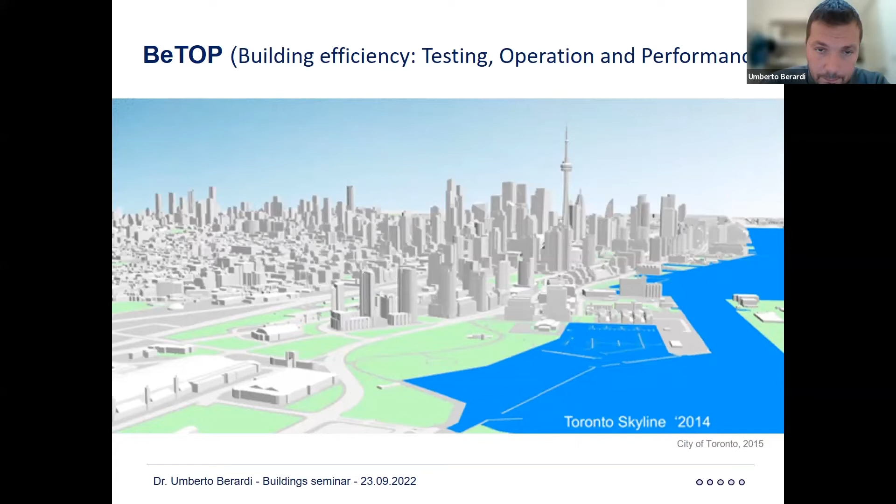So we have been doing new material development, but more importantly, we also have been doing testing in real field, a performance assessment of real buildings coming up and how those new technologies in example cases can really behave in real field.

So here is what I'm going to talk about today. As you see, there are 5 different points of my presentation that you can follow, 1, 2, 3, 4, 5, at the bottom right. And the reality is that I was asked to mainly focus on superinsulating materials, and in that field, my specialty is in aerogel enhanced systems.

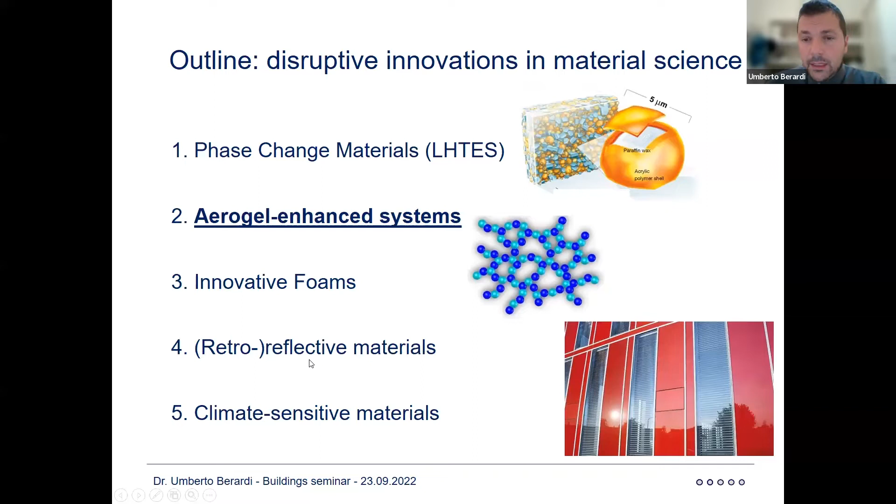But to give you a bit of an overview, I also have been taking the freedom to put a bit of slides on the possible values that phase change materials have in enhancing latent thermal energy storage in buildings, together with innovative foams. The point number 3, as another new category of environmentally friendly super insulating products. And then towards the end, very quickly and briefly, I'm going to speak about retroreflective materials and climate sensitive materials. So let's start together this journey.

Now, you all understand that at the end of the day, building is supposed to provide comfort for people. And in building codes, this is often pushing people to put more and more R-value. Our insulation thickness becomes thicker with a lot of troubles. Our layers are becoming multiple layers with a lot of extra troubles. But the reality is that R-value doesn't really always represent the solution to all the problems.

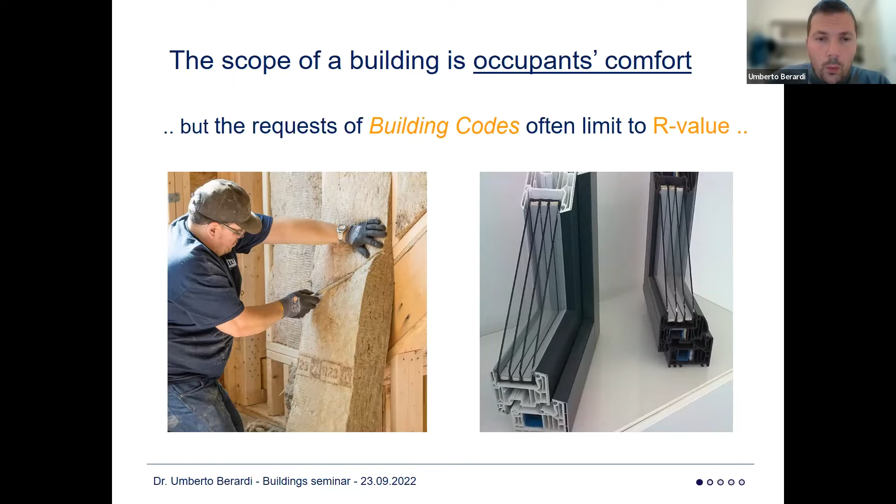And one of the problems that is becoming more and more important, especially in an era of climate change and heat waves and exceptionally higher temperatures than what we were used to have. Think about Toronto. We used to have no air conditioning system 50 years ago in the entire city of Toronto. Right now, in the city of Toronto, for many buildings, office buildings in particular, the cooling demand overcomes the heating demand.

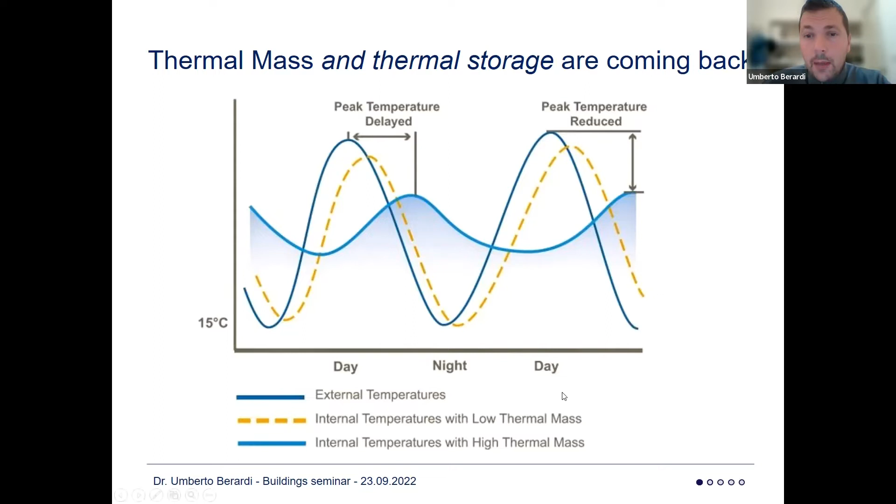So when these kinds of things are happening, thermal mass and thermal storage are coming back as an important factor to reduce the fluctuation of temperature and, more importantly, to slow down the request of cooling power, which is becoming dominant in most of the countries around the world.

Now, you can typically do thermal storage by using sensible storage. So you put massive buildings, massive construction, a castle, a church. You get there in the middle of the summer and it's extremely cold and nice and comfortable. But the reality, that's really not necessarily that sustainable.

It requires a lot of materials, a lot of mass movement that you need to do. And more importantly, it's hard to make skyscrapers with massive construction because you need to actually go up 200-300 meters from the ground with massive blocks. So the alternative way is by using latent energy storage.

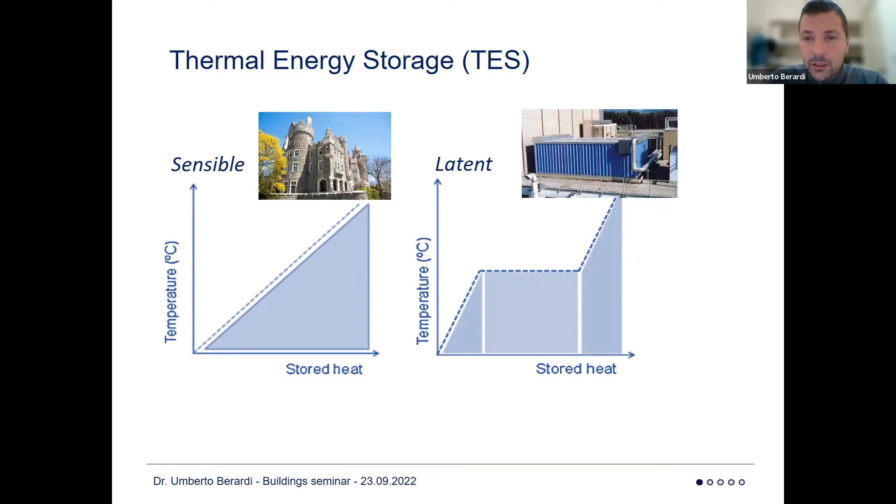So latent thermal energy storage is a new frontier in new materials that is basically applying to the building sector what we do typically when we put ice in a warm glass of water. So in principle, we are taking advantage of the fact that that mass of water, when it became ice, had a lot of energy subtracted.

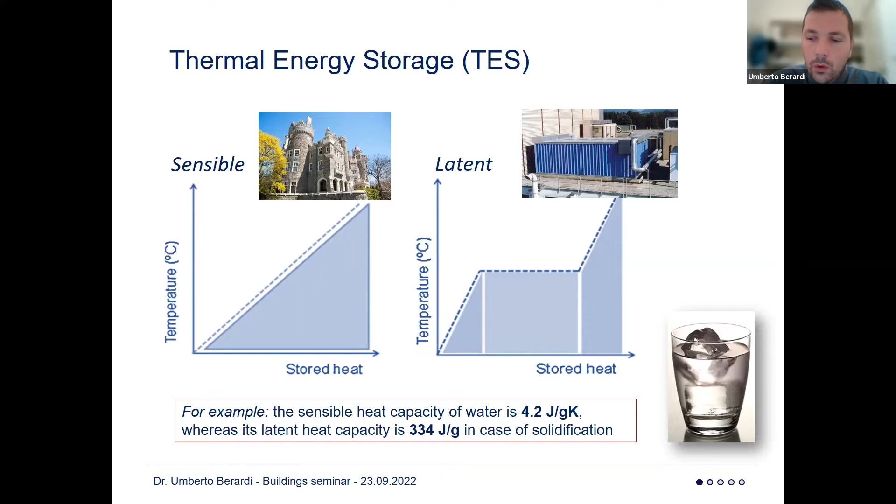And so when it gets into a warm water kind of mug, at the end of the day, it will grab a lot of that thermal energy back, it will melt, and then at the end of the day, you get a very cool glass of water. Now you can do these kinds of things also in buildings, making sure that you get materials that are melting and solidifying.

And because we don't actually like envelopes that are melting or are liquid, what we tend to do is encapsulation of a phase change material, so a material that can undergo a solid to liquid transition. But because we encapsulate those materials, we tend to do what we call a solid to solid thermal energy storage.

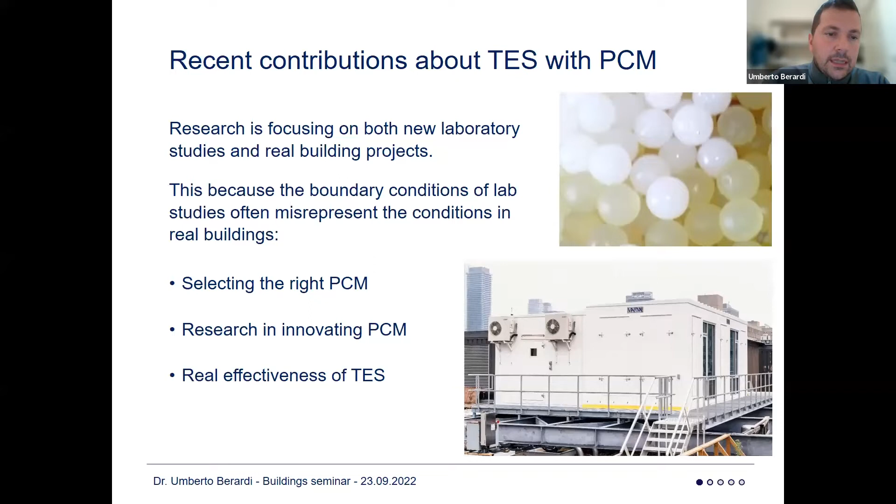Now, there has been a lot of research on PCMs. A lot of research has often been looking at these materials as magic materials. But in my group, we find a lot of challenges with these materials. First of all, because selecting the right material is not straightforward. Researching innovative PCMs that can be affordable, at a low price, is challenging. And more importantly, because often people do a lot of research in a lab or in modeling, but not that many research groups worldwide have invested time to test the real effectiveness of thermal energy storage.

Now, let's actually see these three different research questions. Number one, there are a lot of PCMs around the world. There are so many that it's even hard to characterize them. There are materials that are more toxic, materials that are capable of storing more energy, but in a temperature range that is hard to find in the building sector. So what we've been doing a lot of the time is working with those materials that are often not necessarily the ones that really store a lot of energy, like the paraffins, but they can do that kind of storage in a temperature range that is close to the building-related sector.

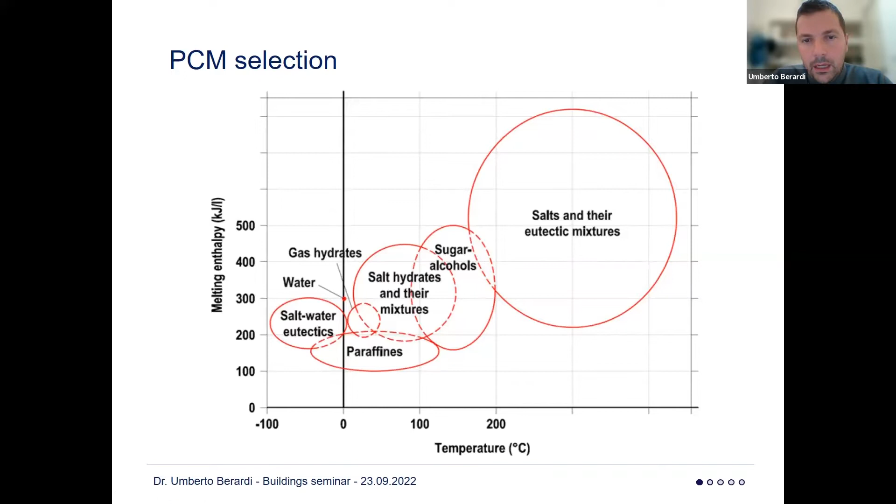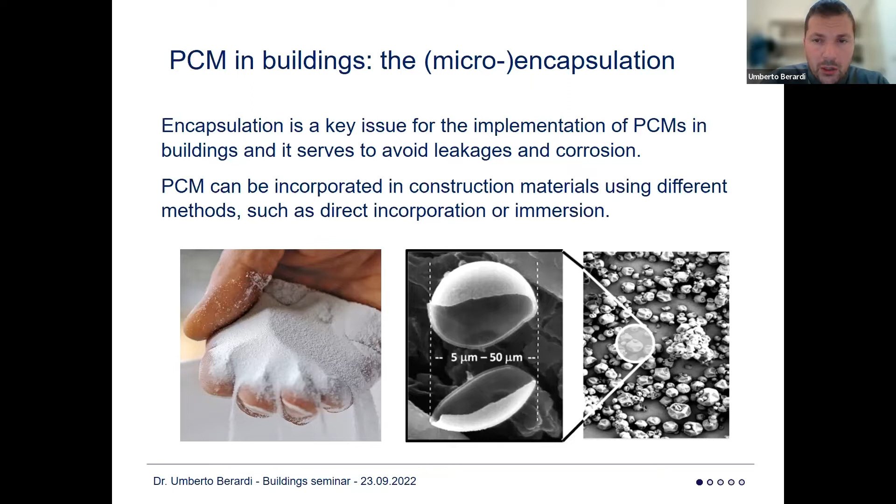Okay. Now this panoramic picture really gives you a bit of the bigger context of PCM. These are some of the materials; you see my hand actually taking a bit of this microencapsulated PCM. And encapsulation is clearly a significant factor in the value of these products. The reality is that polymer encapsulation is often challenging. It increases the cost of the material quite a lot. But on the other side, it provides you a powder. And when you have a powder of PCMs, you can introduce that powder in any porous material by incorporation, immersion, mixing together. There are a lot of applications where you can use that kind of powder.

Let me give you some examples. In 2014, I worked with some students of mine, and we developed a PCM-enhanced concrete floor for a Solar Decathlon house. This house was full of glass and was gaining a lot of extra energy from the sun in the middle of the summer when the contest was occurring. And at the end of the day, it would have required a lot of cooling power. To mitigate the cooling power of this zero energy building, we ended up putting PCMs in a concrete mix. They made the tiles and the gypsum board of the entire house.

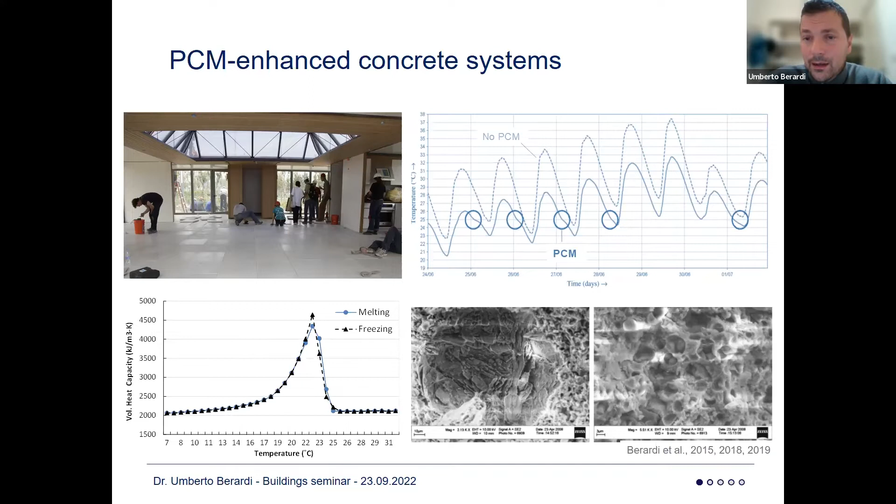There are a few publications I don't have time to go through, but basically we've been doing work on monitoring with and without the PCM, so taking away and putting back the tiles. We've been doing thermal characterization of this PCM, but also SEM pictures just to understand if the polymer of the PCM was staying as it is supposed to stay, or if the polymer could break due to thermal issues or mechanical concrete mixing issues.

That kind of work evolved a few years later when we partnered with a company that does high-rise construction in Toronto, to put PCM-enhanced wallboard and gypsum board in some of the units. Now, the interesting thing of this latest research is that we had real buildings, real towers, and in one floor we were able to substitute a typical gypsum board with a Micronal-enhanced gypsum board, a product that was on the market, although it has now been removed from the market, but it really helped us understand how the fluctuation was significantly slower and significantly more mitigated, in the range of 6 degrees Celsius, with a reduction of cooling energy demand by 15%.

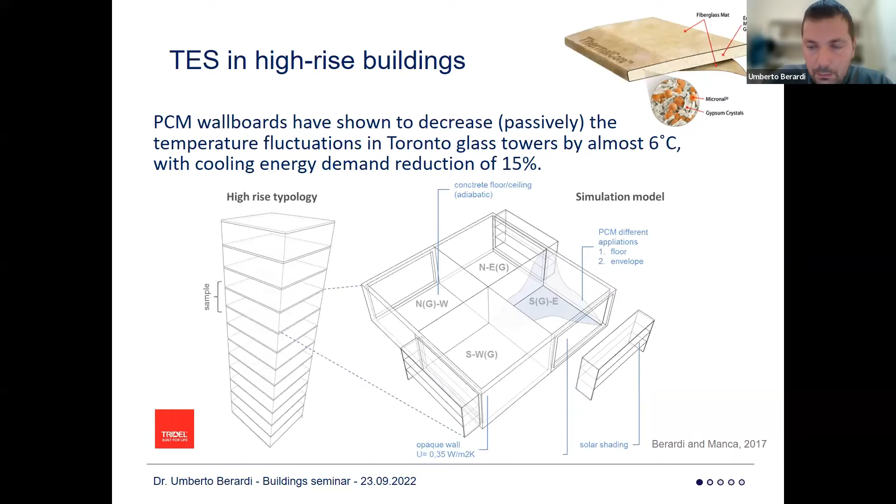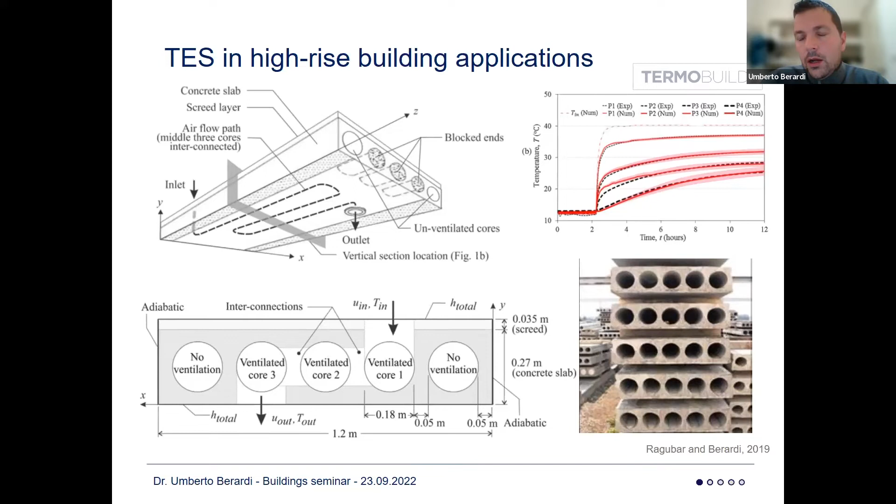We have been doing work on a few other activities, and one of these is a house that TermoBuild, a Toronto-based company, has developed based on a research idea that came from Europe, but found interest in North America, where precast concrete floors are quite common. What we've been doing is accumulating thermal energy in the concrete floor and then enhancing some of those holes in the concrete structure, thanks to the inclusion of PCMs.

And here you get one of the latest research projects we've been doing. We've been working on radiant panels, where the radiant panel is enhanced and surrounded with PCMs.

So we aim to use this TABS system for cooling in offices, and mainly actually to provide cooling power more smoothly in different hours. So doing off-peak and promoting a bit of energy flexibility where the cooling can be on over the night, and basically the radiant panel releases that energy over the following day.

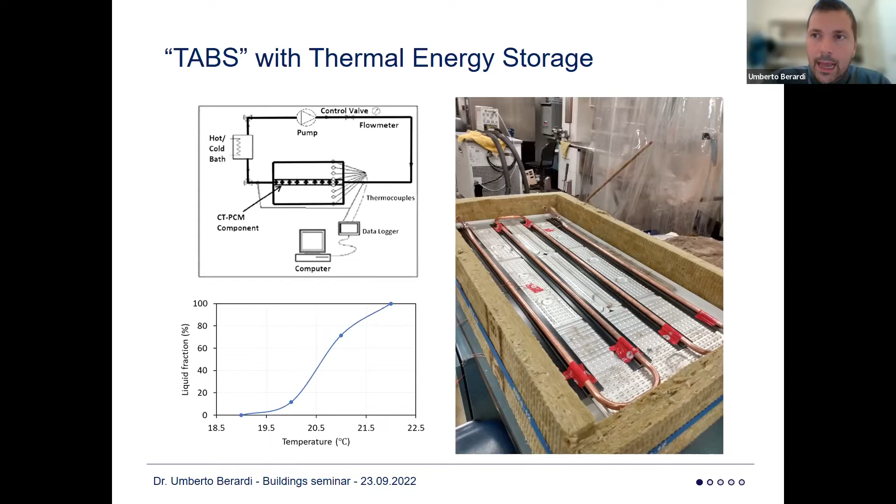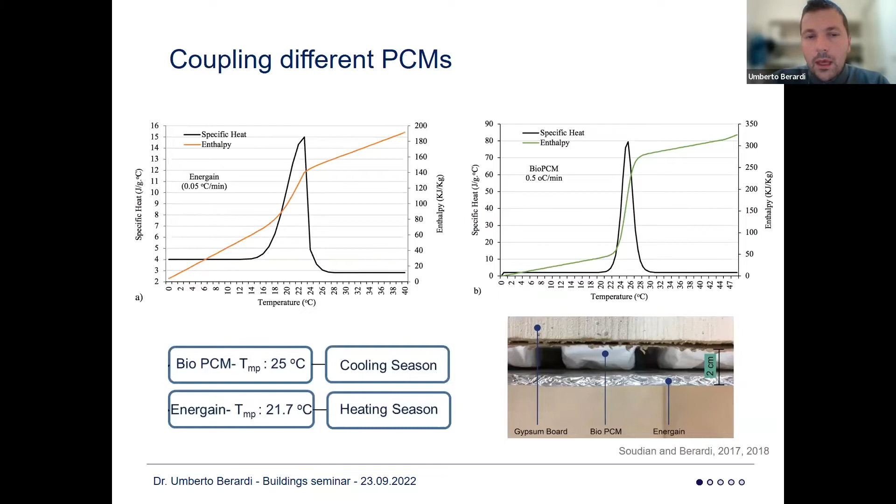And last but not least, we've been doing this kind of work with multiple PCMs and working on different PCMs. On one side, one interesting research area is to combine different PCMs to basically make sure that you can do thermal storage in summer and winter when the set point of internal temperature within a building could be slightly different. So one material can have a set point of 22 and the other material of 25. And so you can address both cooling and heating season.

The alternative is also to start looking at new innovative materials. Now, when it comes to new innovative materials, the challenge is often that we don't actually have a lot of new PCM materials being produced recently. But on the other side, a lot of these materials are expensive. So we had a funded project where we were working with companies that have organic waste from the pork industry and animal oils that they really wanted to get rid of. And we look at this as a new frontier of PCMs and thermal energy storage.

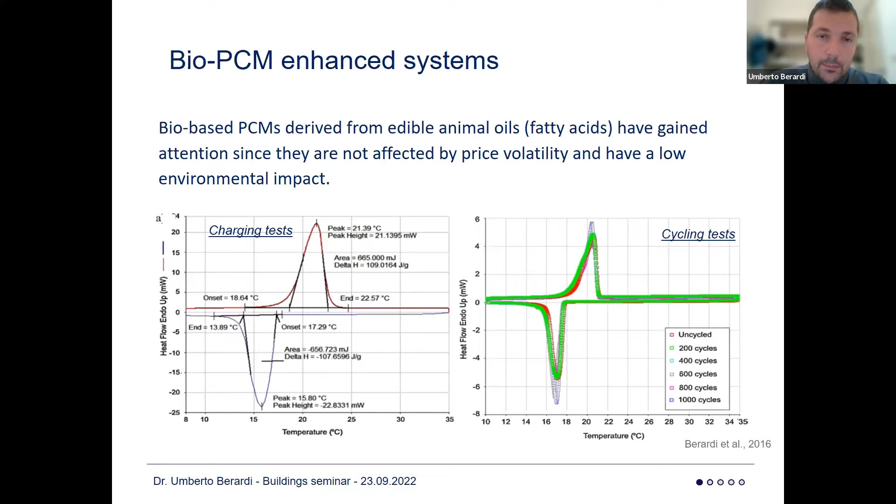And more recently, we've been working on speeding up the process of charging and discharging of the PCMs, enhancing the structure of the PCM with new materials that have been produced with a bit of graphene in the structure. Like in your phone, you want the battery to be charging and discharging very quickly. Well, we do the same thing with thermal energy storage too.

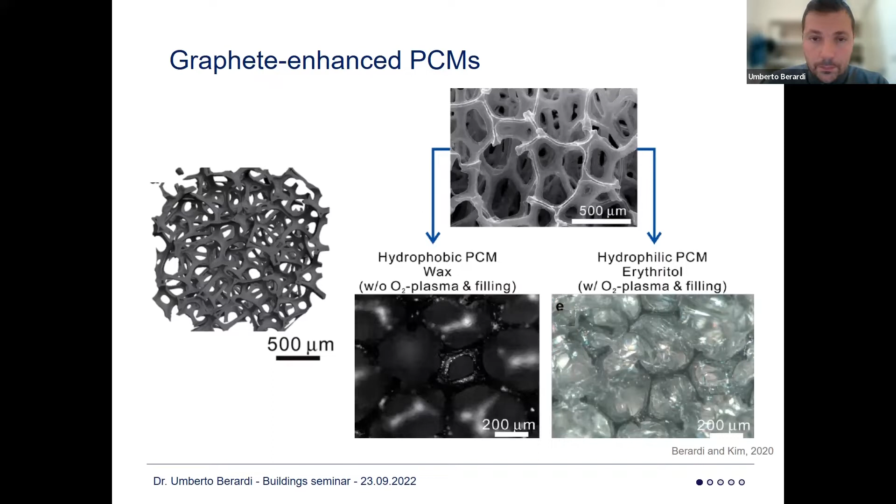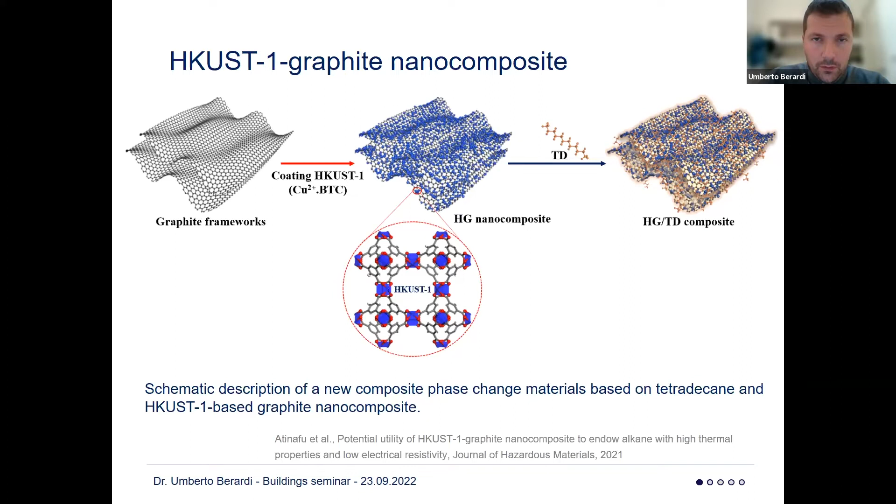And here you get a bit of a sense of the work that my group has been doing over the last few years. Clearly, this is a bit of the early stage, a bit of the chemical side, which you find in journals that are not necessarily the journals where we would expect building-related research, but I can guarantee the application of graphite nanocomposites will soon be applicable to buildings too.

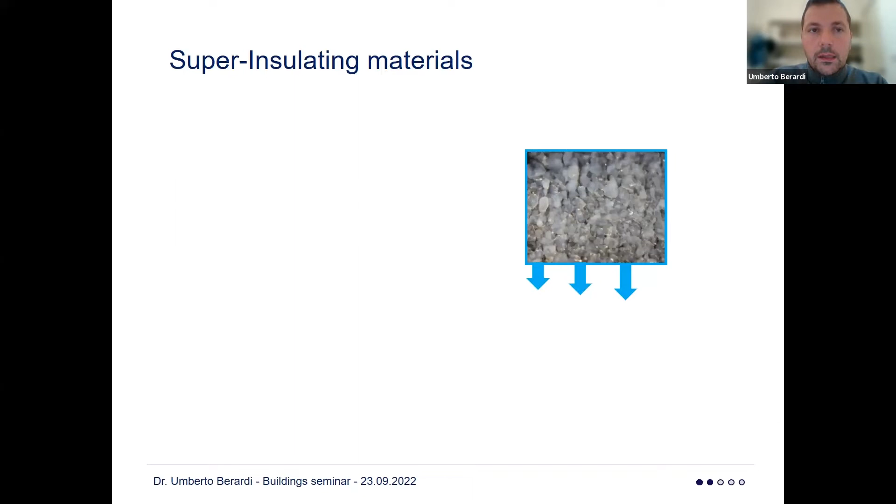Now, let me go to the second and most important topic of today's talk, which is superinsulating materials. When we look at insulating materials, we often tend to present materials that have a thermal conductivity of 0.04 W/m·K or in that range, and to insulate buildings more, we basically increase the thickness. However, different strategies that work on materials with a nano approach have the possibility to reduce significantly the thermal conductivity from values in the range of 0.04 to values, as you can see on the right of this graph, in the range of 0.01 W/m·K.

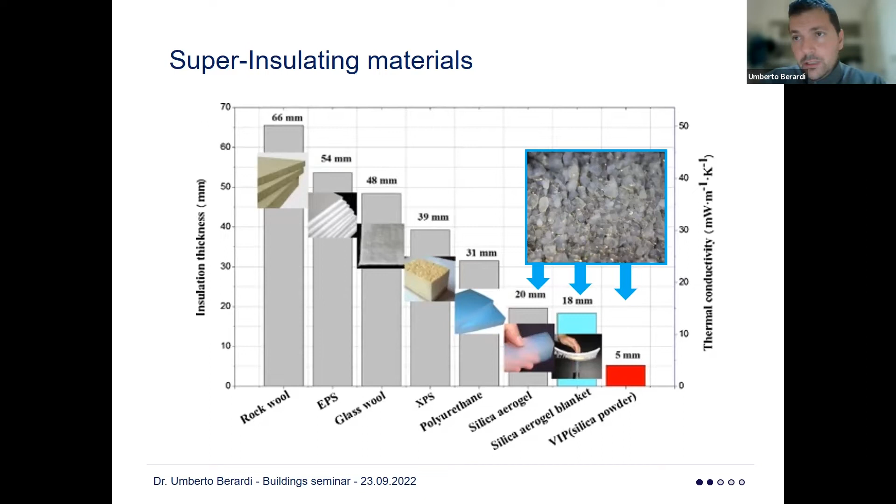Now, what is really the value of this is that you can get the same thermal resistance with a thickness that is a quarter of the thickness you would otherwise have with rock wool. And clearly, the value of this approach is that you save space. When you do a skyscraper with a material that is only 1-2 centimeters thick, instead of a material that is 10 centimeters, the general contractor tends to be quite happy, although the price is still a major challenge.

So I've been working on aerogel, I would say at this point an old material, because it was discovered 90 years ago. So it's not really a new material at all. It's basically made of air at the end of the day. It's full of void. There's not really that much material. It's 98% void. But thanks to the extremely low density, typically in the range of a few kilos per cubic meter, it is capable of getting an extremely low thermal conductivity.

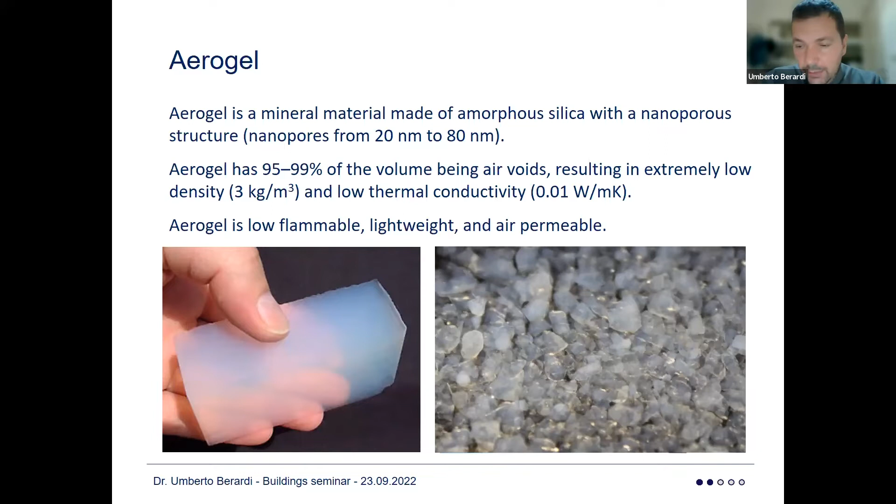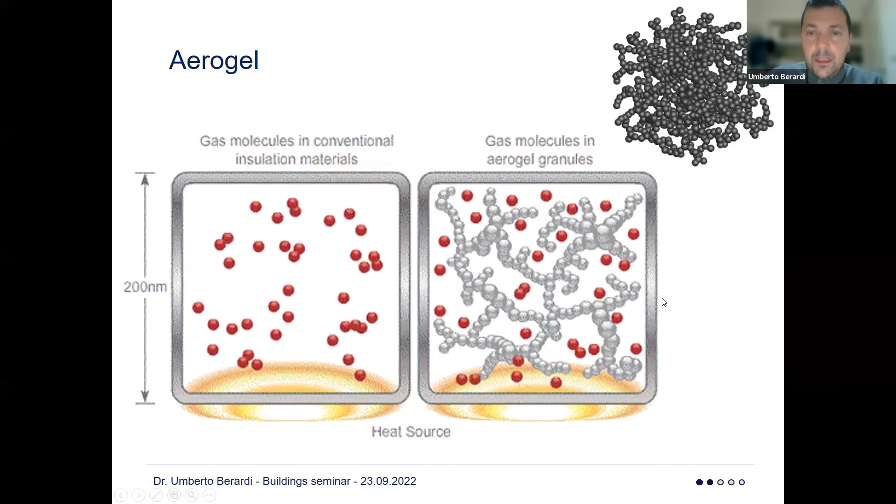So in brief, aerogels do not really enhance conduction because the structure is like a pearl chain. They don't really have convection because particles never touch each other; they never really move over significant space at the micro scale. And they don't have a lot of radiation because they put opacifiers in the structure. So in brief, these are, from a thermodynamics point of view, great ways to lower the thermal conductivity of materials.

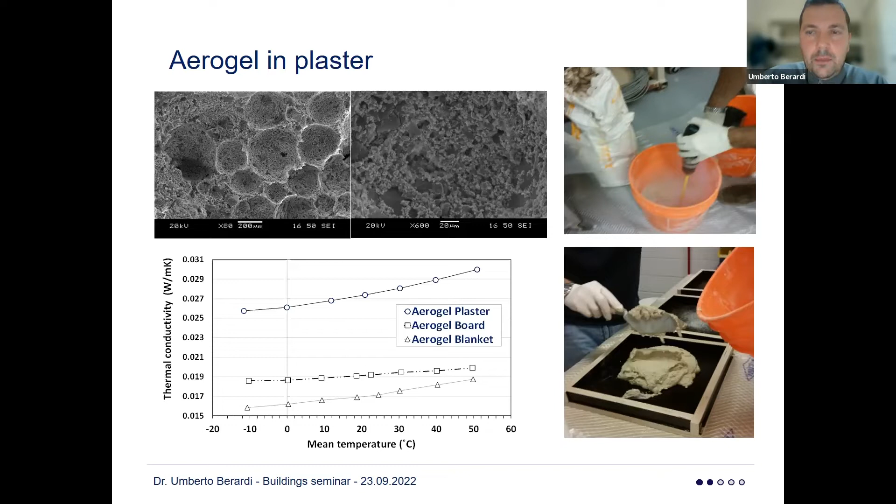Now, we started this work 7-8 years ago by using already existing products, and we were working on creating new materials: plaster, boards, blankets, all materials that were really proving to be effective, highly insulating with very low thickness at the end of the day. But more recently, my group has been developing a unique and new kind of approach to produce aerogel. We wanted really to get over typical products that are expensive because they are patented, and we generated what we call a new innovative kind of aerogel blanket.

Now, where this comes from is that the drying of the gel, which typically occurs in any aerogel, we do at ambient pressure instead of supercritical conditions. With what you often find in the market, supercritical drying processes, the price of all these products tends to be a bit higher, and we've been trying to lower the price of these products to make them penetrate faster into the building industry without an increasingly high cost. So I encourage you to look at this YouTube video to find more papers about the approach we've been following to get the ambient pressure drying processes.

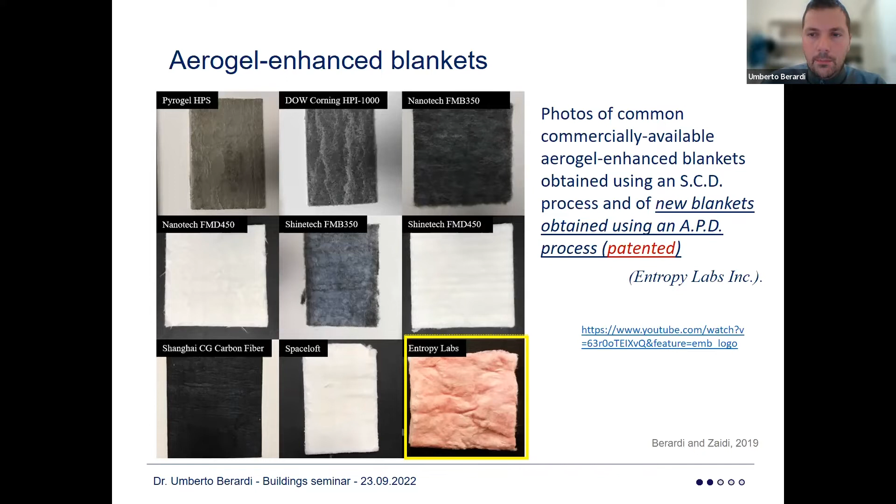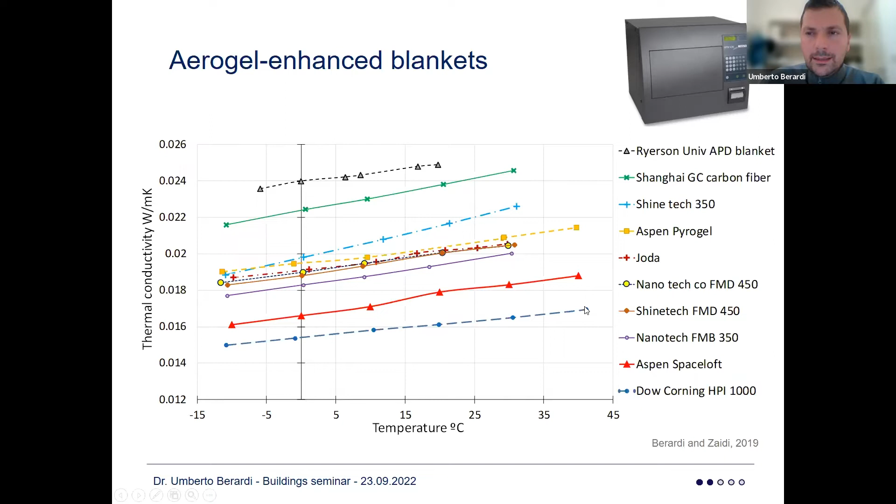Now, just to give you a sense of where we are right now, our product is not necessarily as effective as a few others, but the price is 5 times smaller. Our products tend to be in the range of thermal conductivity of 0.02. When you do ambient pressure drying, you don't really get rid of all the liquid portion, so you get a bit of a higher thermal conductivity. But on the other side, products that use supercritical, high pressure conditions need an autoclave, and they really struggle to make it to market and fight to become the dominant insulating material in the building industry, because producing this kind of material tends to be more expensive and only in small sample sizes.

We also have been working on a few other aspects of aerogel products, such as how we attach an insulating product. If you have a super insulating product and you attach it with materials that are highly conductive, as we often see happening for insulating products, we get a lot of thermal bridges. So we have also been developing special glues with low thermal conductivity to attach these materials and lower thermal bridge issues.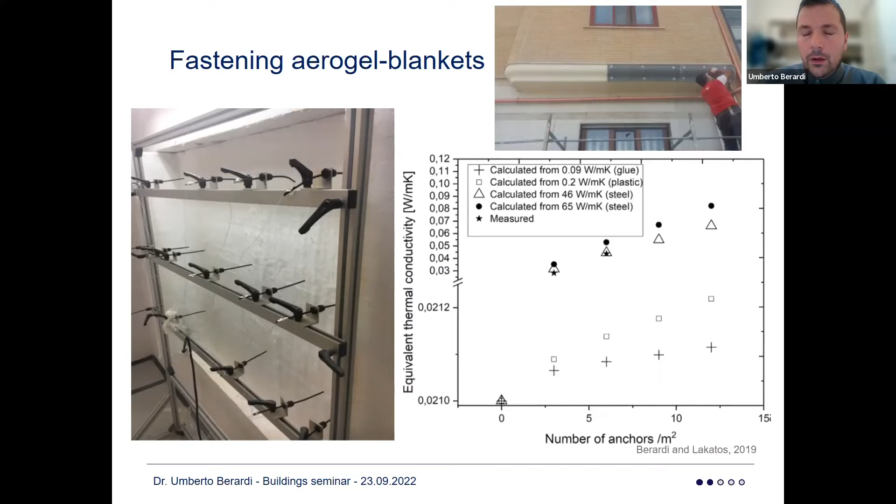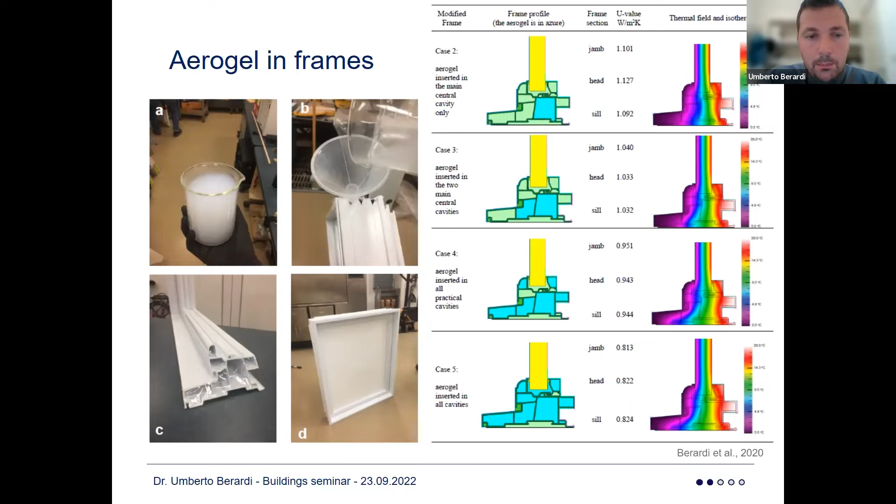We've also been working with Alessandro, the chair of today's talk, to try to reduce the thermal transmittance of windows, both in the frame part as well as in the window part. Here the work is both experimental and numerical. The idea is which cavity really makes more sense to insulate with aerogel granulars, and what is really the beneficial impact of a frame with aerogel in the cavity.

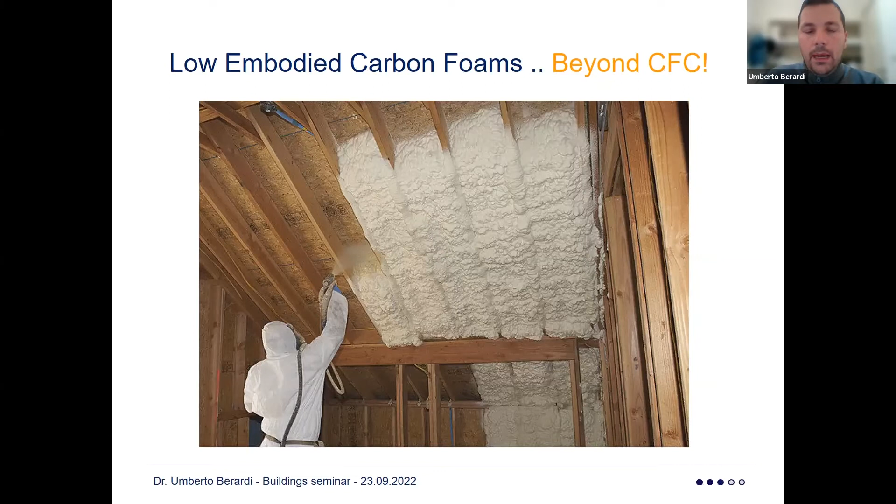Now I'm going to move towards another insulating product, which is not aerogel anymore: low embodied carbon foams. This interest comes from the fact that foams in North America, due to the air tightness requirements, are a significant portion of the insulating industry. And this industry has been affected by the critical role that CFCs have played on the atmosphere and the ozone layer. So, after the Montreal Protocol, we started looking at alternative ways to get rid of CFCs because they were creating a lot of trouble.

We basically moved from using chlorofluorocarbons for the expansion of the foam to hydrochlorofluorocarbons. So HCFCs are the blowing agents typically used in the second generation, 15 years ago. Now, 10 years ago, more or less, in an effort to protect the ozone layer even more, we went to no ozone depleting gas at all. So we moved to hydrofluorocarbons, HFCs, which are still the standard third generation blowing agent.

And what we've been working on in my lab is moving towards the fourth generation of blowing agents. These are blowing agents that have not only no ozone depleting power, but also a global warming potential of 1, because at the end of the day, they use carbon dioxide to blow the foam.

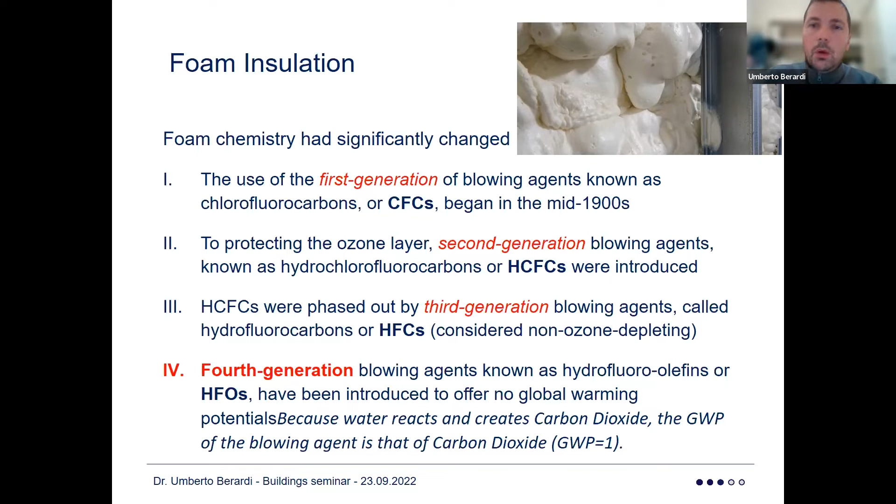So the reality is that these kinds of gases are much more environmentally friendly. But on the other side, they have a few challenges, and we've been working on improving the challenges of these gases. Number one, the CO2 tends to escape from the material, and so air diffuses inside the material. And with air, a lot of water vapor enters the material. So moisture penetration is a problem.

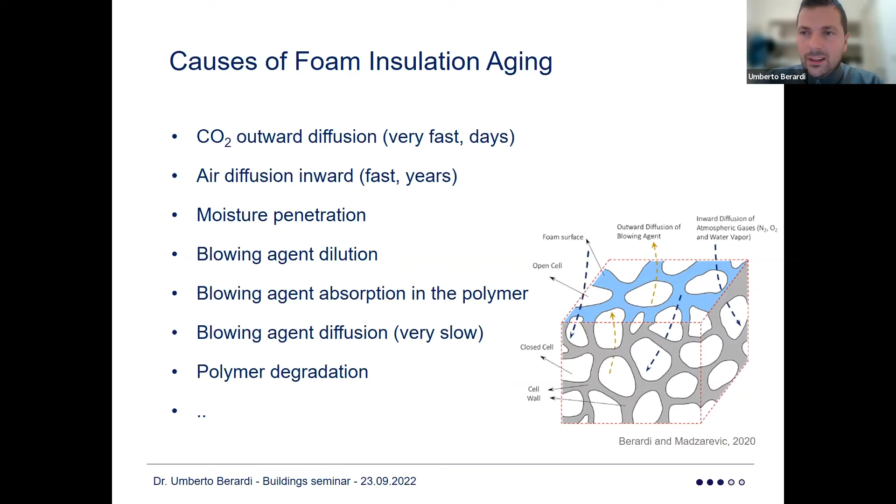And when you get moisture penetration, the thermal conductivity is no longer the nominal thermal conductivity, but it starts affecting the polymer structure. And really, this is what we often call aging of the foam. The reality is that the polymer starts to degrade, and it occurs a lot in the first month, but it will keep happening for the following years after installation.

And the reality is that what we used to have, a low thermal conductivity, thanks to the possibility to cut as much as possible convection and conduction in the porosity of the foam, starts being much more significant, because here you start getting water vapor instead of the blowing agent.

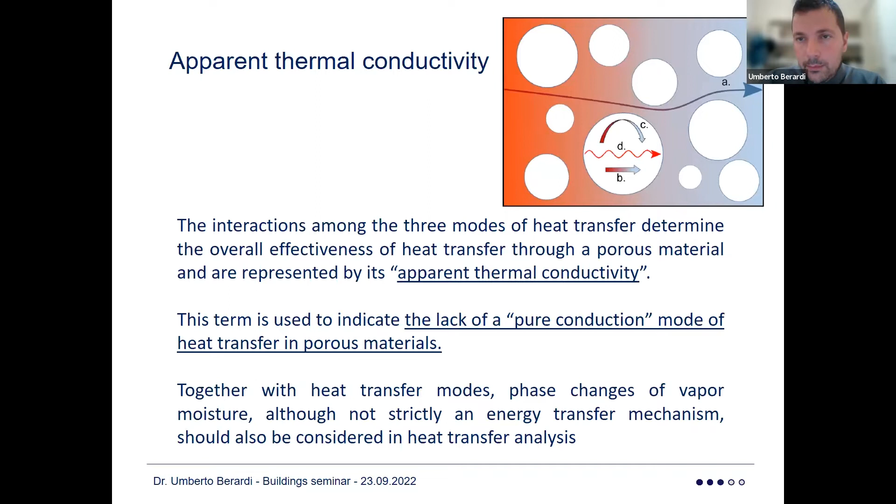So what we've been working on is the apparent thermal conductivity of these materials, and also the long-term apparent thermal conductivity. In other words, the material doesn't only conduct; it does convection and radiation in the porosity. And we want to look at the long term to understand what the material will do years after the application. So we have been working with different techniques and approaches to look at the long-term properties of this material. There are some standards in North America that are helping us do these kinds of things.

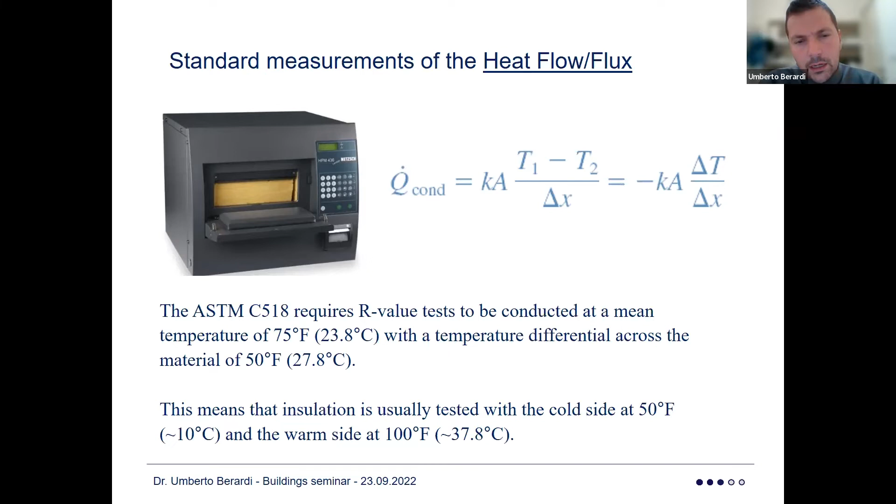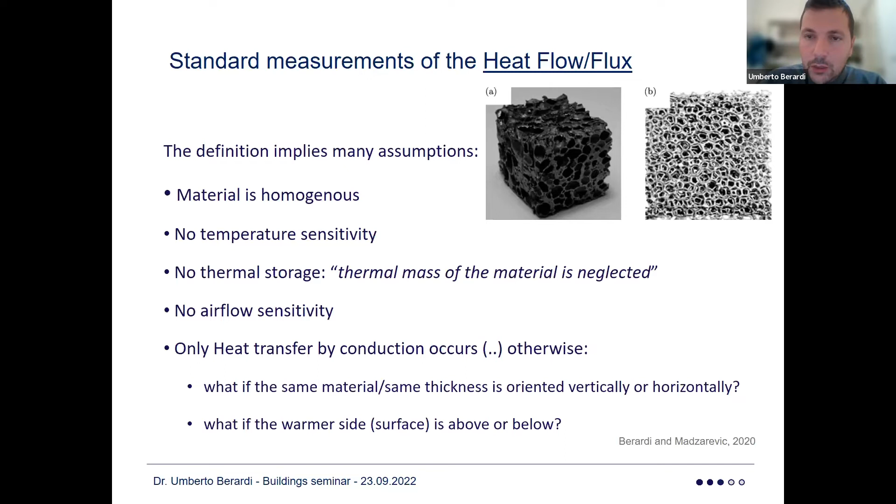But in brief, what we've been doing is trying to overcome the assumptions that typically are made in heat flow measurements. If you look at the premises of most of the codes, standards and norms for thermal conductivity, you pretend the material is homogeneous, is not temperature sensitive, doesn't accumulate heat, doesn't get affected by airflow paths, and more importantly, only transfers heat by conduction. In reality, these materials do quite the opposite. They are affected by air, they're affected by moisture, they're affected by temperature.

So let me start looking at temperature influence. Now, as we can expect, higher temperature often means higher thermal conductivity. And that's a very basic, simple thermodynamics law. Higher temperature means more energy in the cavity. More energy means the particles are capable of moving more quickly. So faster particle movement really means higher convective heat transfer.

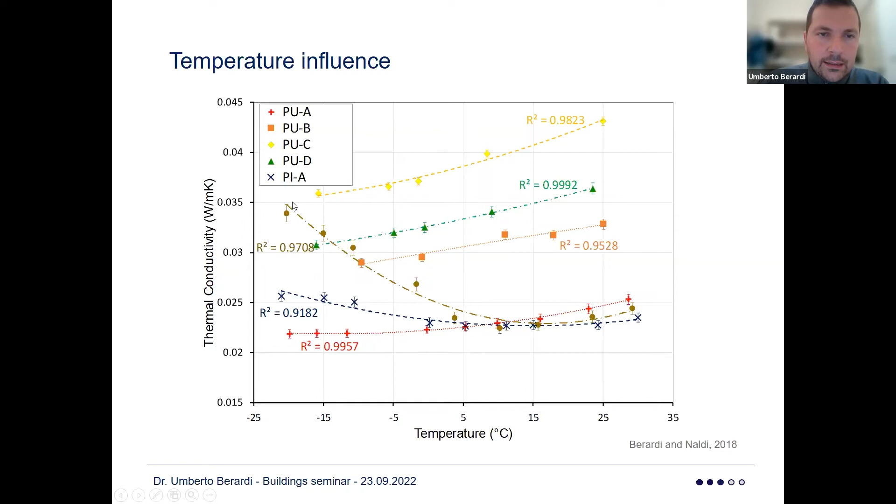The reality is that these kinds of challenges often occur for polyisocyanurates, by far the most common products these days in roofing for commercial applications in North America. Polyurethane, the top four graphs, do not necessarily have a significant impact, but polyisocyanurates have a significant impact.

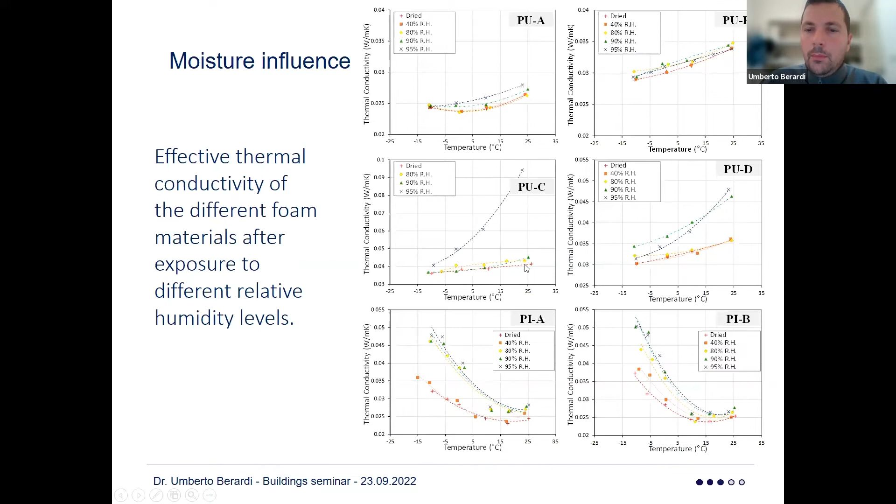So in brief, what we've been working on is trying to promote laws and approaches where the thermal conductivity, instead of being a single value when it comes to these super insulating products with innovative foams and innovative blowing agents, is a 3D curve where thermal conductivity is a parameter affected by relative humidity and temperature.

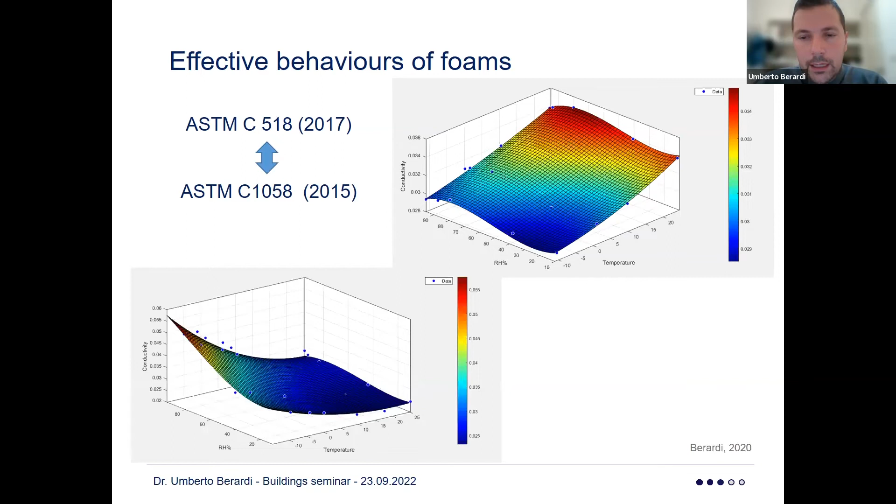And we've been doing this kind of modeling and studies where we've been looking at real field materials, putting thermocouple sensors and heat flux sensors, and looking at how in summer, for example, you get very stable conditions, and then on the other side you start getting significant challenges when you get lower temperatures. You can see here the dotted line that represents the general result of the exterior surface of that same material, supposed to act at 0.02 W/m·K, ending up at 0.06 W/m·K.

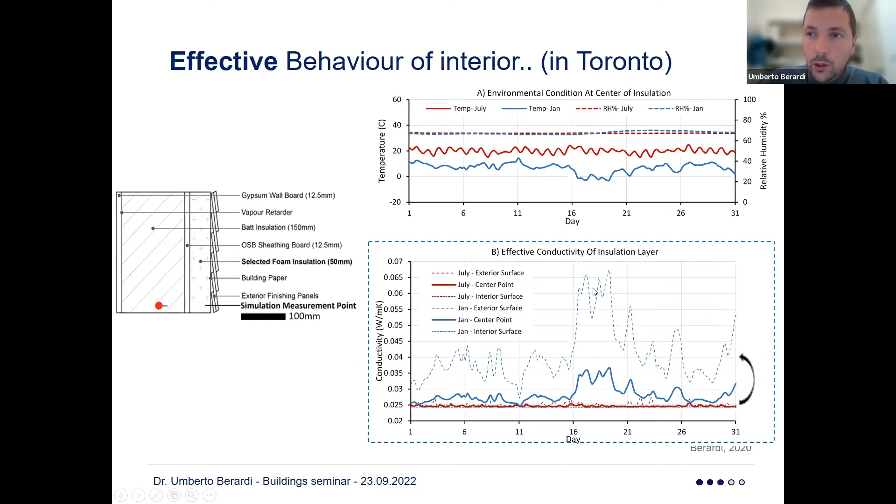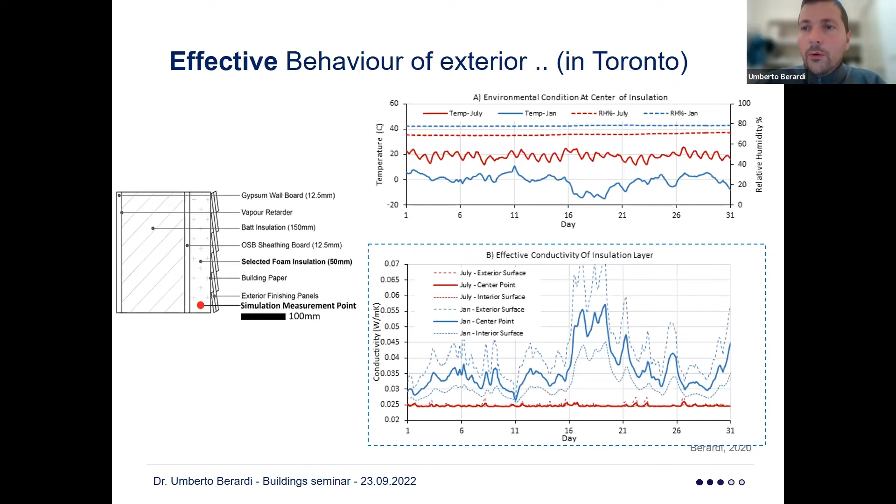And you can expect this is really kind of challenging, especially if we want to promote high-performance buildings, because you look at hypotheses that are not reflected in the real field. We also have been working on trying to improve this polyurethane thanks to aerogel. So we've been doing some work and papers on aerogel blowing within the polyurethane component B.

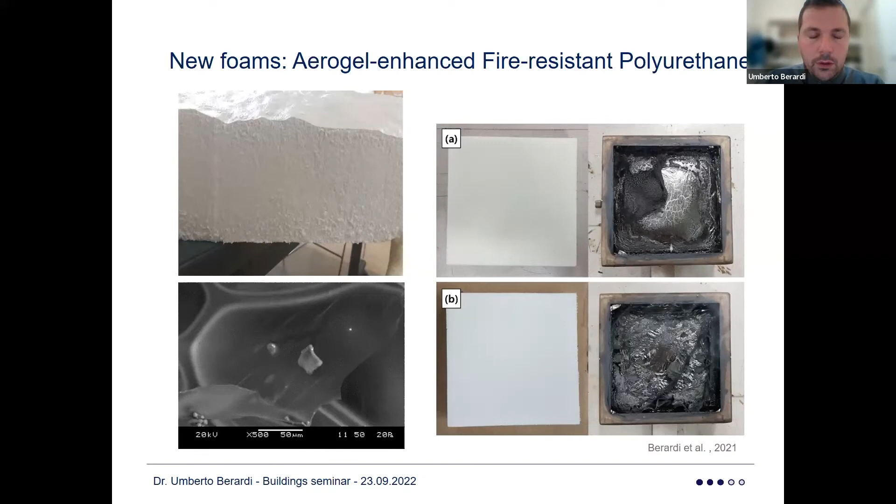And that's it. So in the interest of time, I'm going to stop here just to give you a bit of a panorama. And before leaving you, I want to give you a bit of a sense of what we are also doing for novel technology and new materials. Now, first of all, we have been working on possible application of new materials for fighting the urban heat island effect. A significant problem, especially in Toronto.

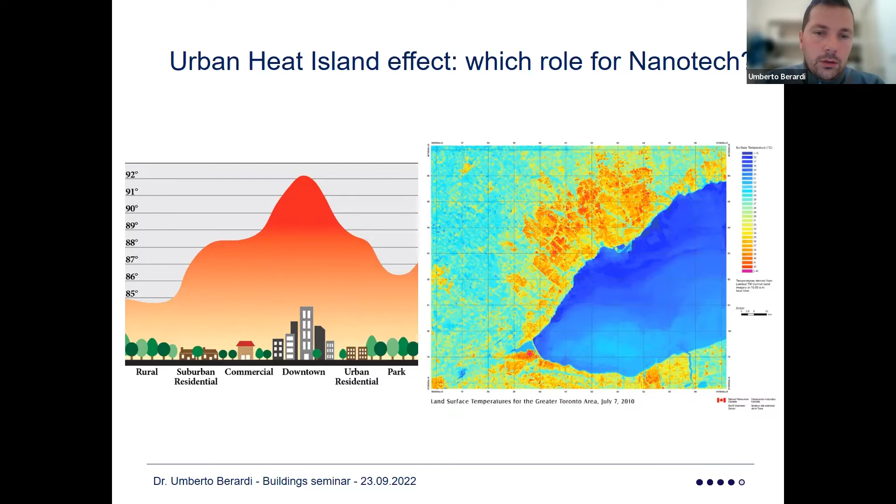If you look at that kind of slide that I was showing you before, you really get the sense of how critical it is for a city that develops a lot to put a lot of those towers and get a lot of thermal storage from materials that at the end of the day are going to store a lot of that solar radiation. So we have been working on colors, different reflectivity, materials with a traditional color in the visible range, but with a thermal reflectivity that is much lower or much higher, to actually promote options for new construction in Toronto.

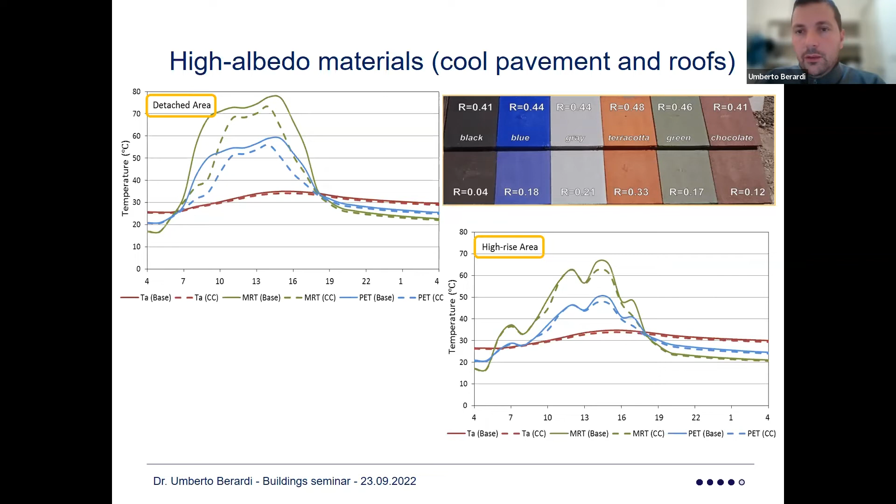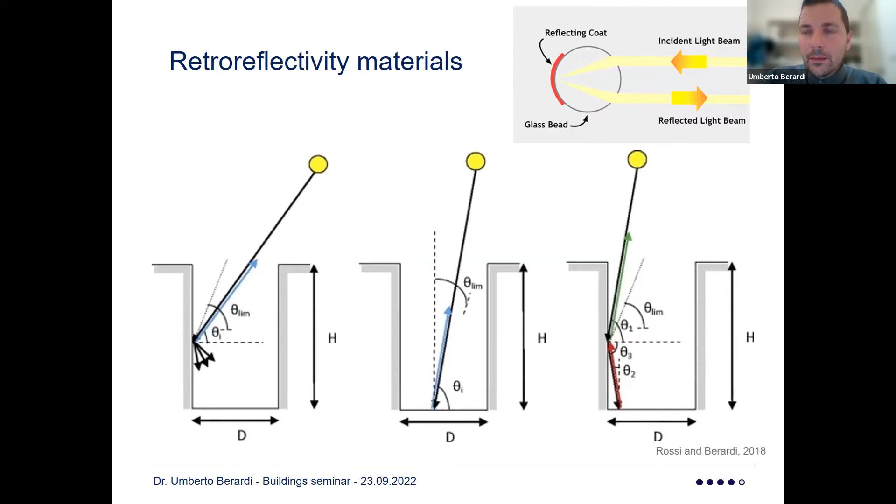And to be honest, this has been a very effective strategy of engaging with the government, because the government has been putting in a lot of new incentives for people to look at cool materials. So right now in Toronto, there are significant financial benefits for those using cool materials in their buildings. We've been working on reflective materials as a way to not only cool down your building, but also the opposite building, making sure that the reflectivity of the material doesn't become an extra gain for the opposite building, but gets reflected back towards the sky.

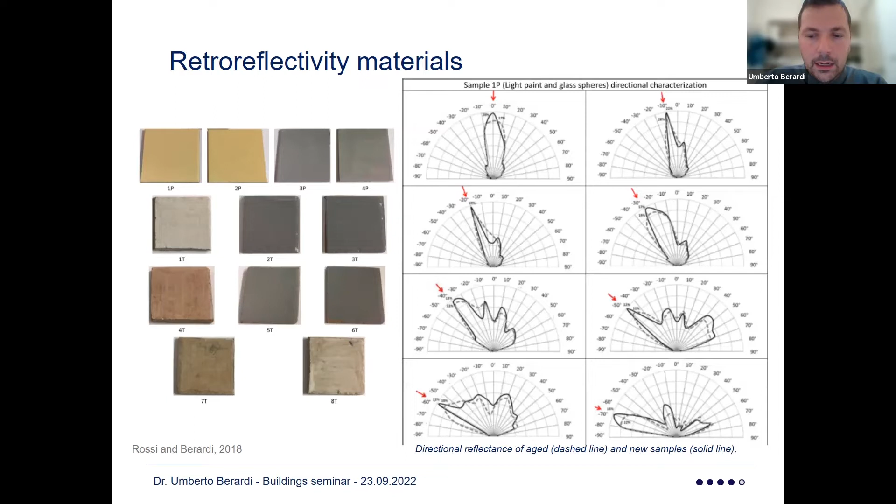And that reflectivity and retroreflectivity has been studied for new materials, virgin materials, and aged materials. So the skills that we have developed in testing aged materials have often been strategic for cool materials research, because we have been able to research what happens to these materials years after installation.

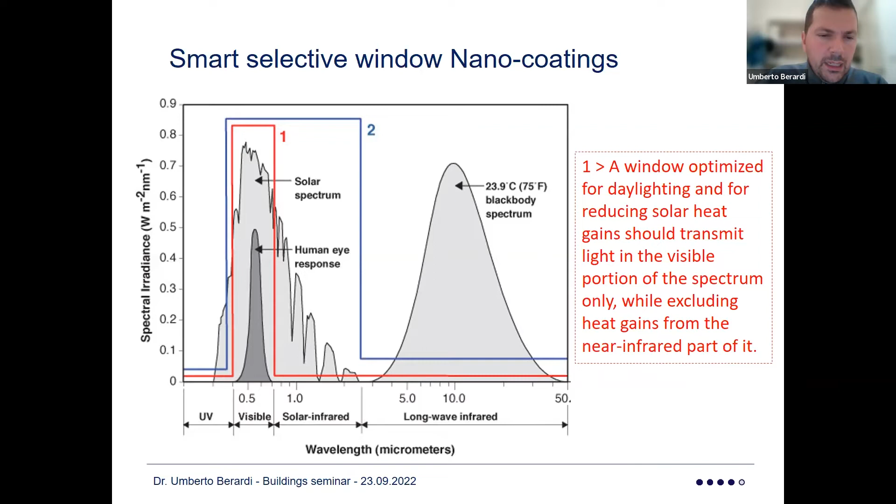Now, similar research is done not only for the opaque portion of the envelope, but also for the transparent portion of the envelope. It's been helping us work on nano coatings for windows. The idea here is very simple. We are looking at materials that allow high transmittance in the visible range, and are able to cut completely the solar infrared. We've been working with a company that has partnered with us and patented a product that can be applied in post-retrofit of windows.

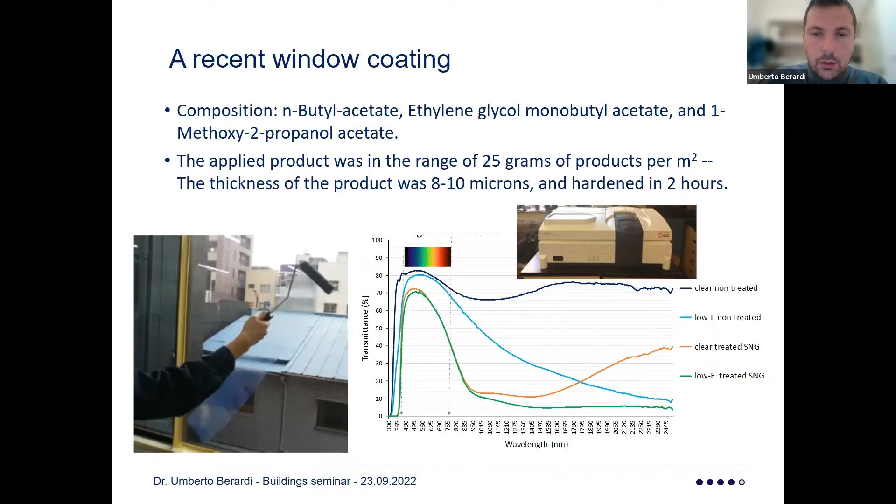So existing windows can be coated with this material, which really helps cut down significantly, as you can see from the graph, the transmittance, from a clear non-treated glass to a traditional low-E non-treated, down to a clear treated material. And if you combine the lower infrared transmittance of this product with a low-E, you start getting a window that just allows visible light to pass through, making sure that whatever is not of interest gets transmitted at only a few percentage points, both in the ultraviolet and in the infrared range.

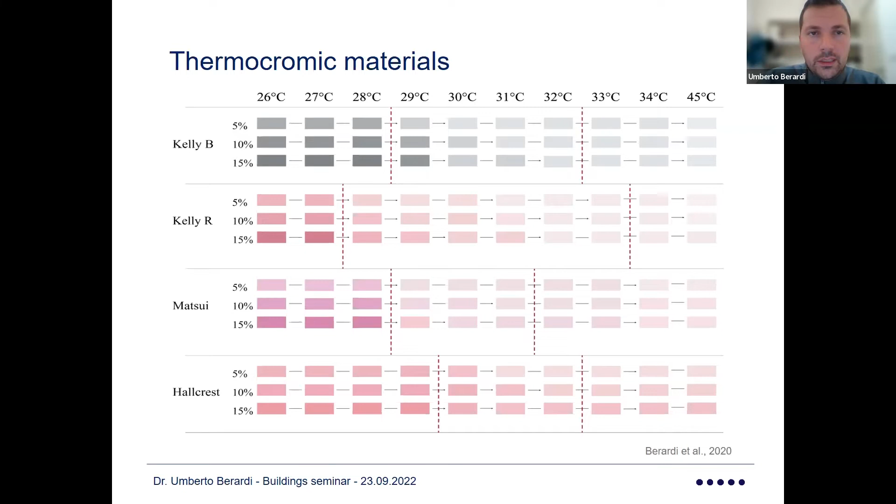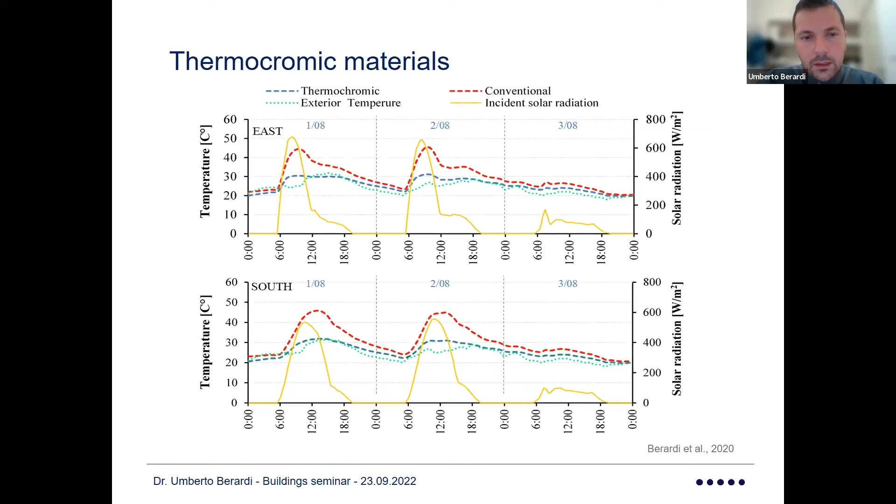And last but not least, we started working a couple of years ago, then the pandemic resulted in a bit of a delay in this research line, and I've been spending more time outside Canada over the last couple of years. But we've been working on thermochromic materials and their potential for the city of Toronto. So we have a new test facility, and we have been testing different tiles on model boxes and real field boxes, and we look forward to doing more research in this field.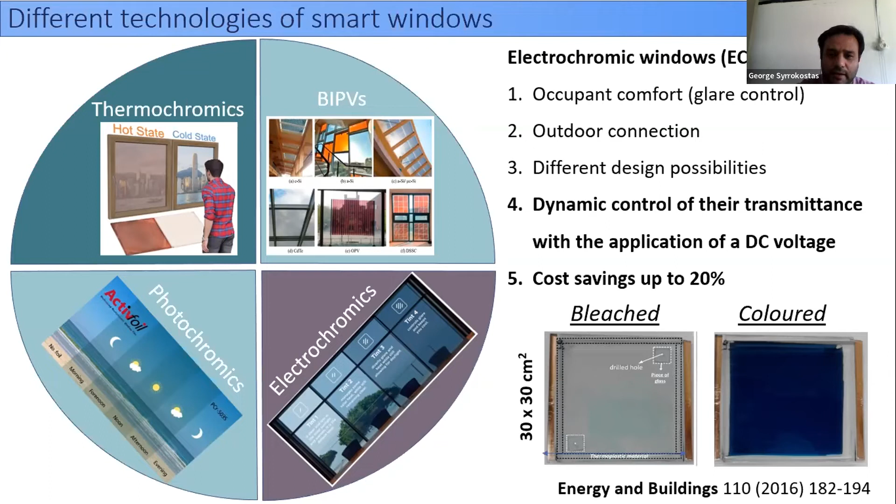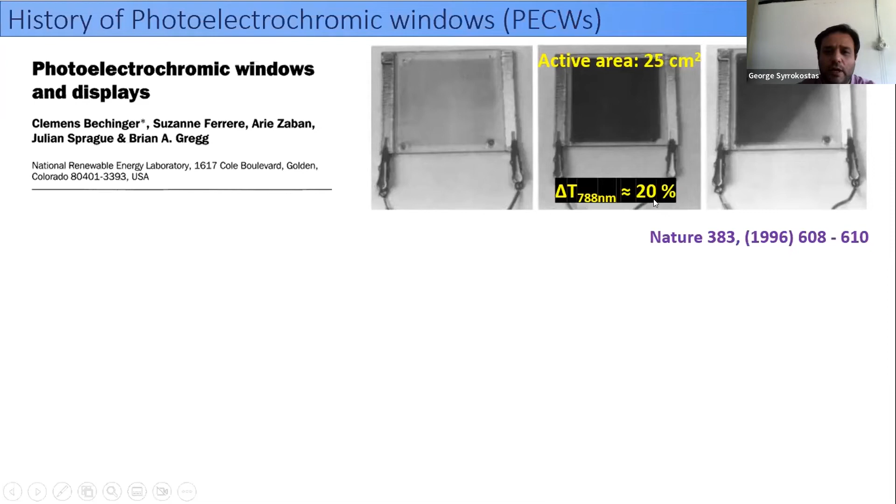So these photoelectrochromic windows have a dual behavior. On the one hand, they can generate energy, and on the other hand, deliver a smart optical response. Therefore, as we will see, they combine a PV unit with an electrochromic unit in one unified device. The first appearance of photoelectrochromic windows was nearly 25 years ago in Nature, where a photoelectrochromic window with an active area of 25 square centimeters achieved an optical modulation of 20% in less than 2 minutes. The architecture of such a device was very similar to that of a dye-sensitized solar cell.

In the case of a dye-sensitized solar cell, at the anode we have a nanostructured titania film with thickness above 10 microns, sensitized with an appropriate dye. At the cathode we have a very thin platinum film, and between them there is a redox electrolyte like an iodide/triiodide one. And the role here of the cathode is to collect electrons from the external circuit and to catalyze the reduction of triiodide ions to iodide.

In the case of the photoelectrochromic window proposed in Nature, at the anode we have a very thin transparent titania film sensitized by an appropriate dye. Again, since the film is very thin, the amount of dye molecules that can be adsorbed on it is less. Therefore, the utilization of solar light is not so efficient. And moreover, at the cathode, the thin platinum film is missing, and we have the electrochromic layer.

As a result, when photoelectrons are produced by the absorption of the dye, when they reach the cathode through the external circuit, now they reduce the electrochromic layer, and due to the simultaneous intercalation of lithium ions, as we see here, the electrochromic layer changes its transmittance.

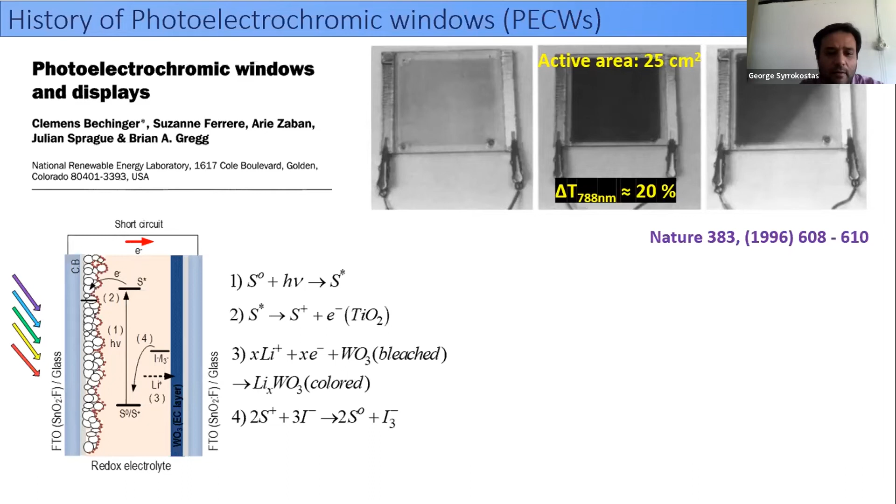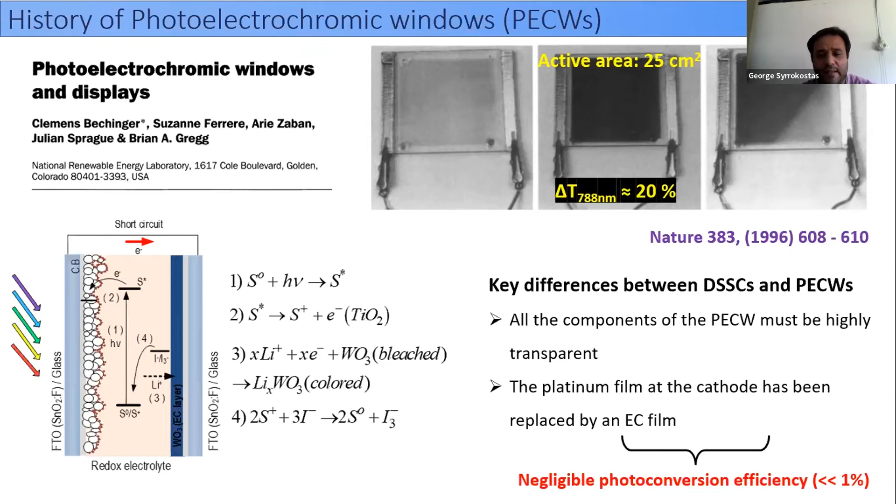Therefore, there are two key differences between the dye-sensitized solar cells and the photoelectrochromic windows. First, in the case of photoelectrochromic windows, all the components must be highly transparent. Therefore, the utilization of solar light is not so efficient. And also, the platinum film at the cathode is missing, meaning that the reduction of triiodide ions is not so efficient. And for both of these reasons, the photoconversion efficiency of these devices, at least initially, was negligible.

The device architecture is crucial since it can affect significantly the performance of the devices, and the challenge is to combine the PV unit and the electrochromic unit in one unified device. To do this, there are 3 different modes. In the first mode, we integrate the PV unit and the electrochromic unit into one single unit. These devices now have 2 electrodes. In the second mode, we use a common substrate. In this case, the substrate has both its sides conductive. This is a tandem configuration.

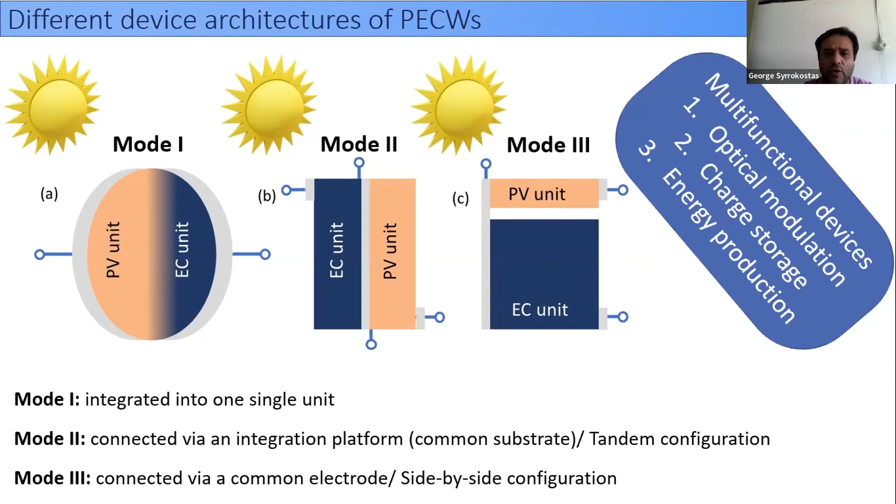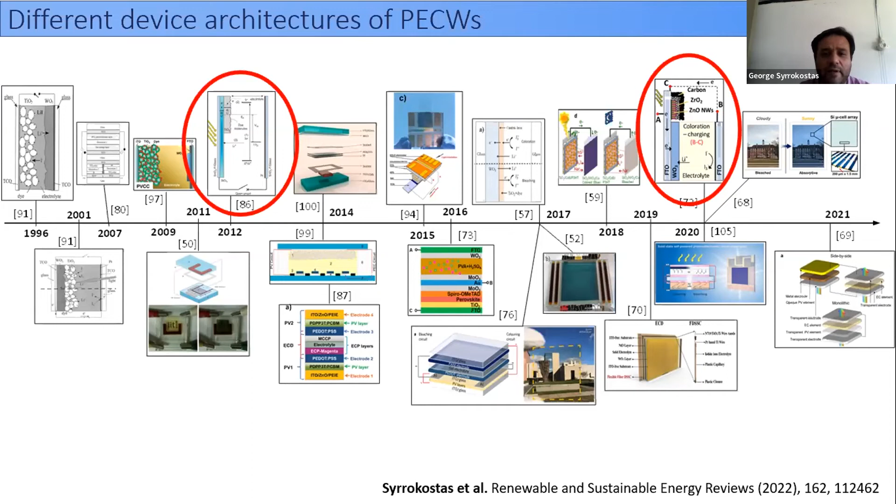And here we see a timeline of the different device architectures that have been proposed the last 25 years. And to show you our contribution in the field, 10 years ago, we introduced the partly covered design. I will mention more later in my presentation. And also 2 years ago, we used a carbon-based perovskite solar cell to power the electrochromic unit of a photoelectrochromic window, having a side-by-side configuration.

But to continue with the state of the art and the current state of photoelectrochromic windows, of course, there are different indicators to describe their performance. Here, I have chosen to show you two graphs. On the left side, there is a graph of the transmittance modulation with respect to the photoconversion efficiency of these devices. We see that today we have devices with photoconversion efficiency up to 14%, but in this case, the optical modulation is very low. Also, we have many devices in this area, and devices that have a photoconversion efficiency of 2 or 3%, but a transmittance modulation above 50%. That is comparable to a commercial electrochromic window, which is at least 50%.

Of course, the challenge is to improve the photoconversion efficiency while having a transmittance modulation above 50%. And to do this, we need devices having an initial transmittance above 70%, or at least in this area. And also we need to improve the coloration depth. To improve the coloration depth is much more challenging since we have electron losses. We have to cut the electron losses at the electrochromic layer/electrolyte interface. This mechanism is called self-bleaching.

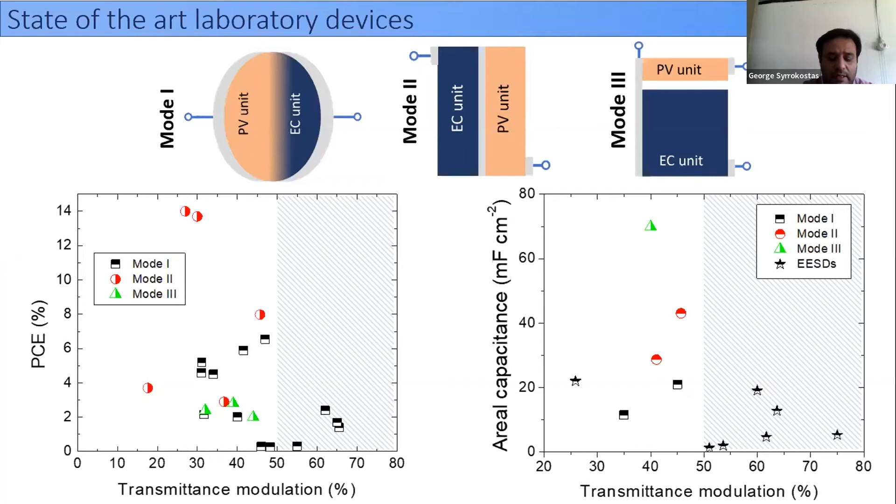In our case, in the case of photoelectrochromic windows, we have to examine the role of the redox electrolyte, its composition, and also how the different redox couples affect the charge storage properties of the devices. Therefore, we see that it's difficult at the same time to optimize the optical properties, the charge storage properties, and the solar energy harvesting.

When we started to work on photoelectrochromic devices, there were these two different device architectures, the separated one and the fully covered one. Both of them had a very thin, transparent titania film. In the case of separated architecture, the electrochromic layer was at the cathode. In the case of fully covered architecture, the electrochromic layer was placed at the anode, and we also had the platinum film at the cathode. Both of them had their own advantages and disadvantages, but the common issue was the limited photoconversion efficiency.

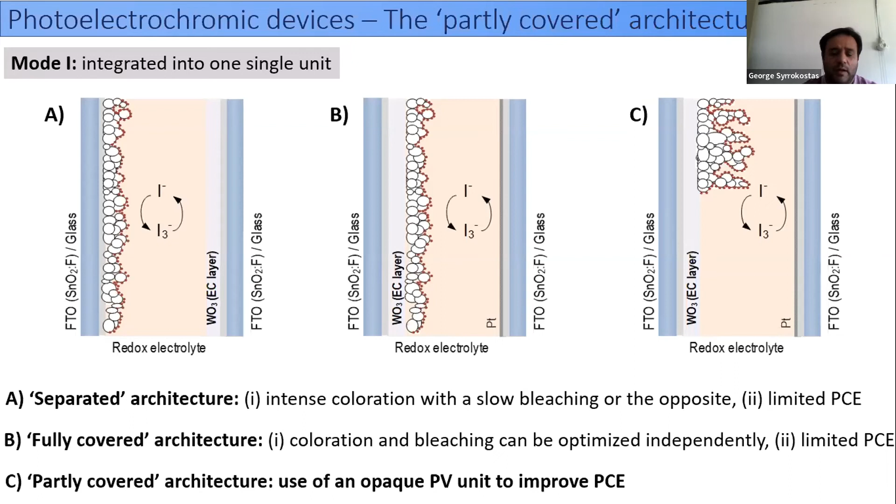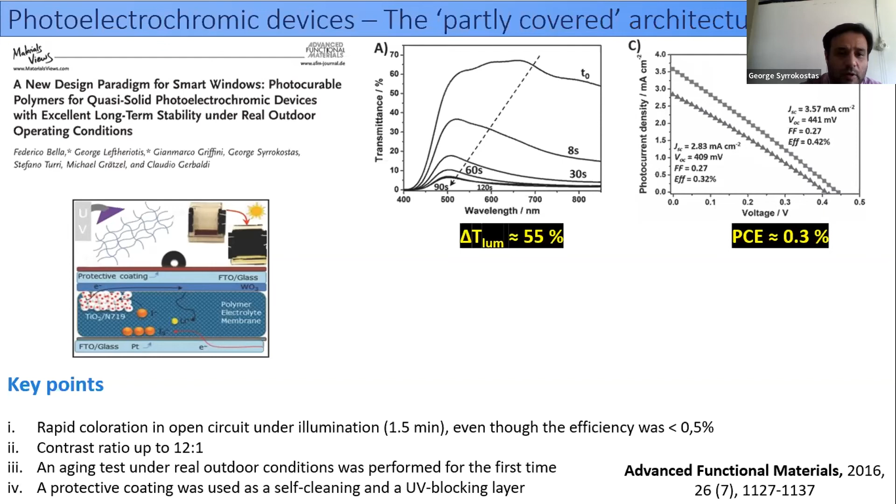Since then, we have examined a lot of parameters that can affect the performance of these devices, for example, the role of the electrolyte, its composition or its state. In this publication, we used a polymer electrolyte membrane, and we achieved an optical modulation around 50% and a photoconversion efficiency of 0.3%. More importantly, the coloration time was now less than 2 minutes, which shows that the diffusion of lithium ions inside the polymer electrolyte is very efficient, and the faster coloration time is also due to the improved photoconversion efficiency.

Here we can see photos of this device in different operation states. And the most important in this work was that we proved that such a device can be stable even after exposing the devices under real outdoor conditions. Here we see the transmittance values in their initial bleached state and in their colored state. Their values are very constant even after 90 days of continuous exposure under outdoor conditions. That was an aging test performed for the first time then, and I believe the only time until now, since the stability of these devices is usually examined using continuous cycling.

Later, we used an electrolyte having a copper-based redox couple to replace the iodide-triiodide redox couple. In this case, we wanted to solve the corrosion problems that are usually met with the iodide-triiodide redox couple. Also, we used a very thin graphene nanoplatelet film instead of the platinum film. In this case, the optical modulation was above 60%, and the coloration time was very fast, only a few seconds. Again, these devices were extremely stable even after 400 days of continuous operation.

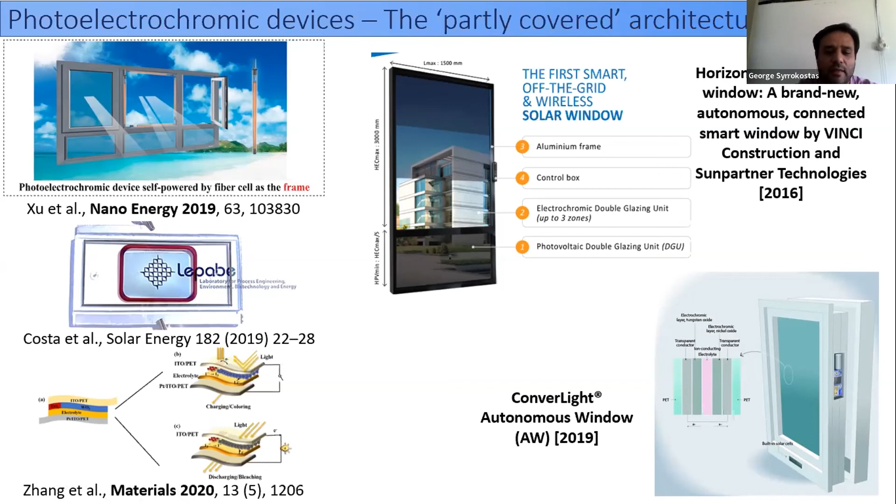And to conclude my presentation, photoelectrochromic windows are solar-driven windows for energy-efficient buildings. They are truly multifunctional devices. During the last years, new materials and new device architectures have emerged that promise significant improvement in their performance and stability. Coloration and bleaching can be in the range of a few seconds, optical modulation even above 50%, and photoconversion efficiency depending on the device architecture. These all are the good points.

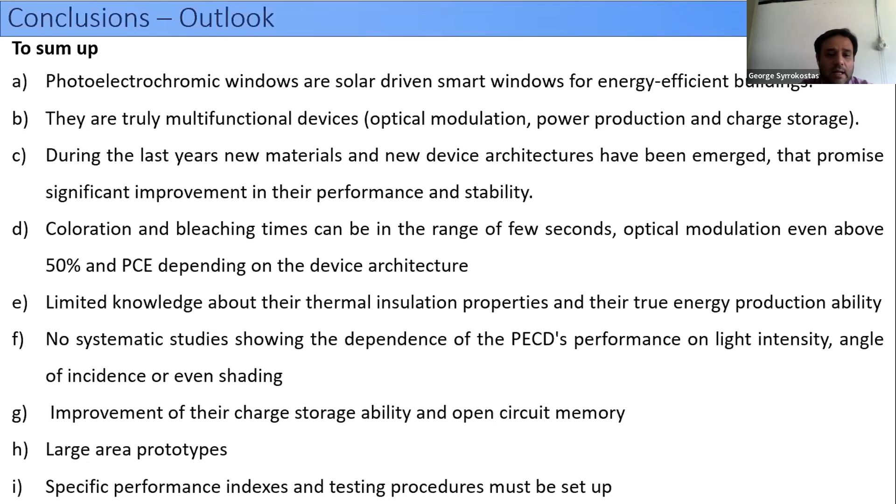On the other hand, there is limited knowledge about their thermal insulation properties and their true energy production ability. There are no systematic studies showing the dependence of their performance on light intensity, angle of incidence, or even shading. We have to improve their charge storage ability and, of course, open circuit memory through minimizing self-bleaching. We need more large area prototypes. And in my opinion, we have to set up specific performance indexes and testing procedures, because sometimes it's very difficult to compare the results between the different research groups.